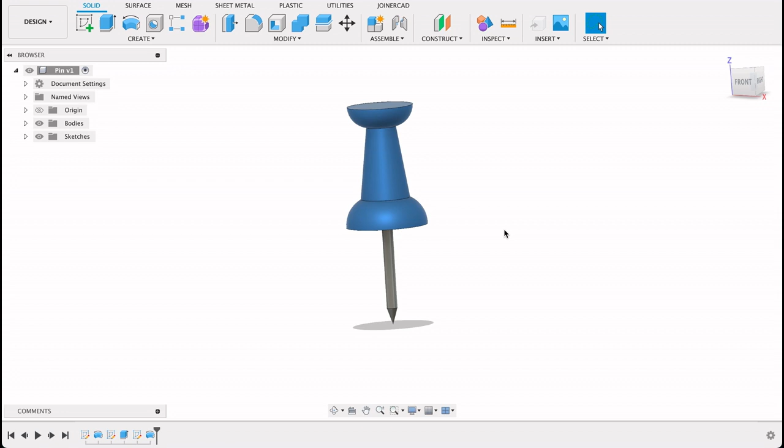So follow along and see how you go. So here, using Onshape, I've just created a new sketch. I'm going to sketch here on the front plane. I can push N and it'll make it normal to that plane. We are going to draw our pin. So we're just going to draw the head of the push pin.

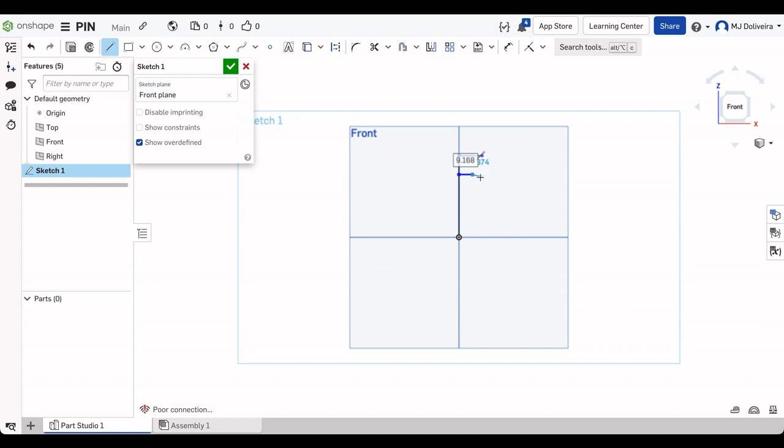I'm going to use the line tool, go up and just get a couple of these lines in. L for line tool. And I'm just going to make these random lengths and we will dimension them shortly. This bottom one I'm just going to go past there, because last time I tried to make the little curve and it was giving me some issues, so that's what I'll do there.

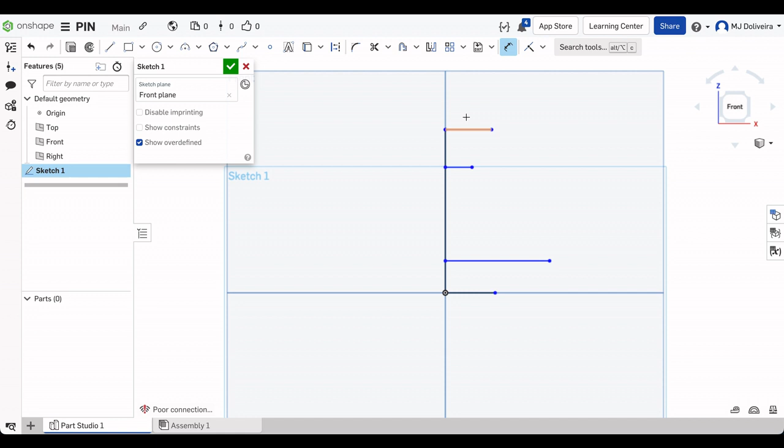And to dimension it, I have got this pin head. It's got an overall dimension on the top here of 7.3, so I can go 7.3 divided by 2 and it will work it out for me. There, it's scaled everything down for me. This next one as well, I'll dimension it. It is 3.3, so that would be 3.3 divided by 2.

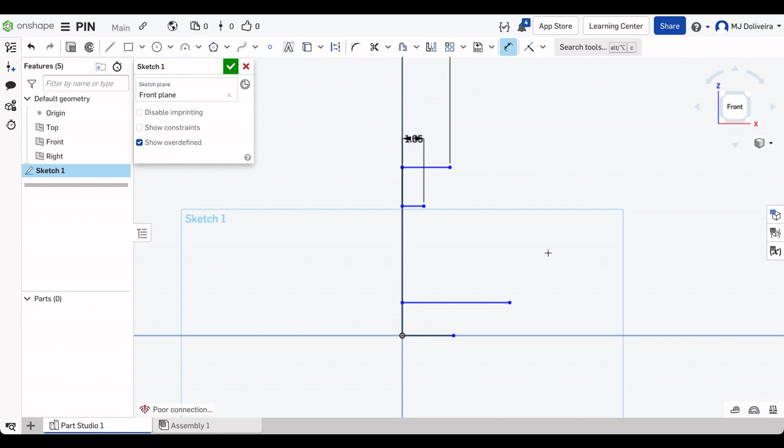So Onshape's quite a cool program. Only problem is that because it's only online, it can give you some issues when your internet speed is a bit poor.

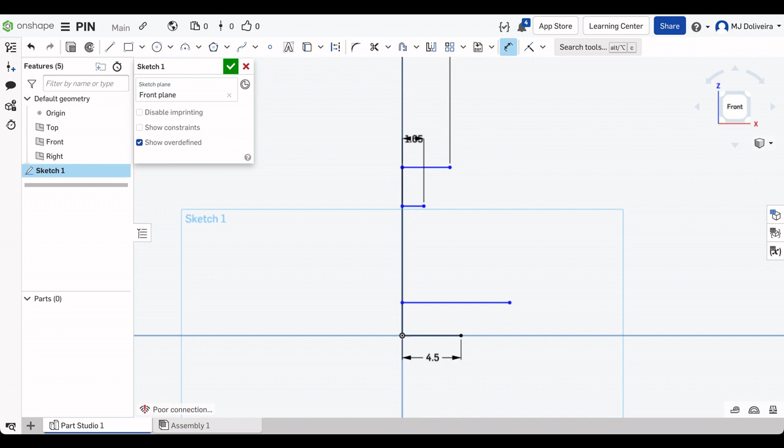So this will be 9/2. Now we can start getting the dimensions between them. So that's 3 millimeters. You'll see everything will start to turn black once it's been dimensioned. And this is 2.3.

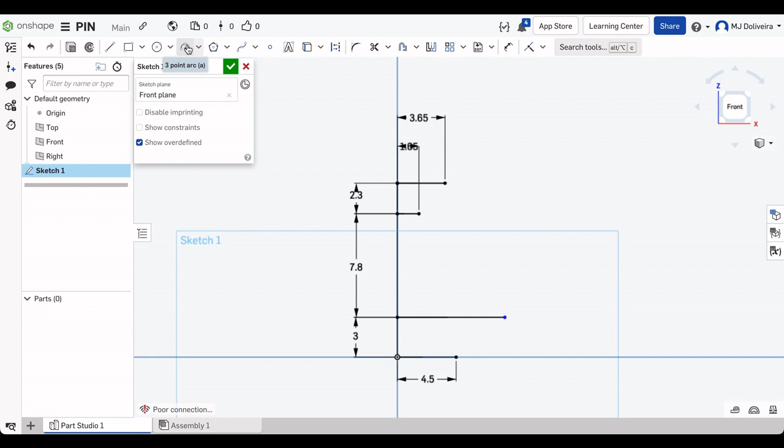We're going to start off by making this curve here. So what I'm going to do is I'm going to go to 3-point arc, select that. Select these 2 points, and you can see as we move it out, it moves it. So I'm just going to make it a little bit less than what I want, and then I'm going to dimension it. So according to the dimensions, that's 2.4 millimeters. So there we go, it is constrained according to what we want.

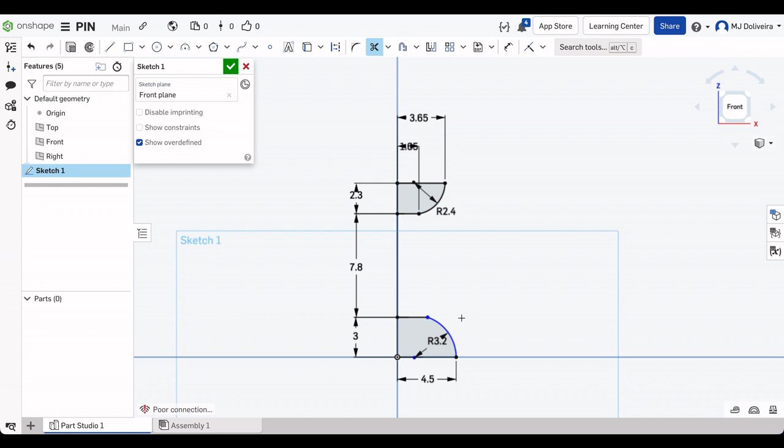Again, I'm going to use a 3-point arc, select that point, select any point on this line, and then we will go 3.2. So the reason I did it like this, when I was doing the little practice one, it was giving me some issues where it would make this big bulge or not join the line properly, so I just chose to do it like this. You can push M. M is your trim tool, so we just trim off the excess there, and then we can use our line tool and go between those points.

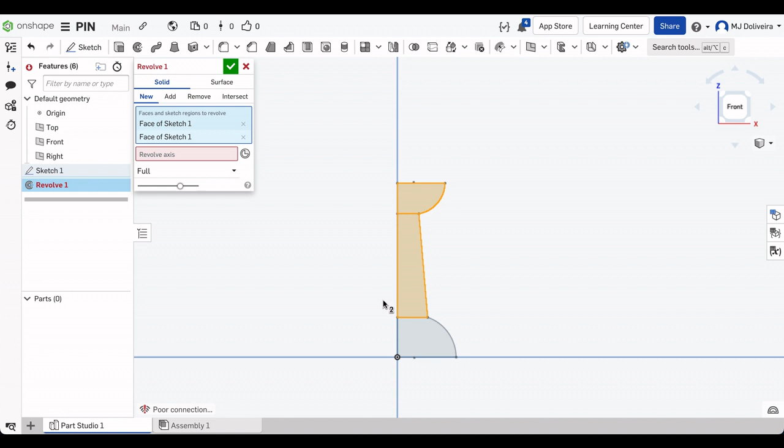Now it's the same in Fusion. We've got a revolve tool. We select the areas being revolved. Let's try that again. Okay, now selected. Now we select the revolve axis and we should have our pin head. So we can see there we've got the pin head, nice. Now we just need to draw the pin.

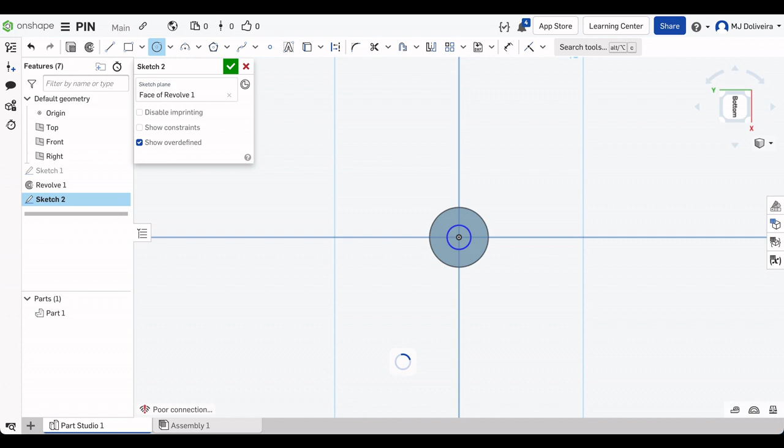So I'm going to create a sketch, select that plane and push N. We're going normal to the plane we're on. Circle, let it snap to center there. This is 1.2 millimeters. So let's just click there, 1.2. Okay, now we will extrude this.

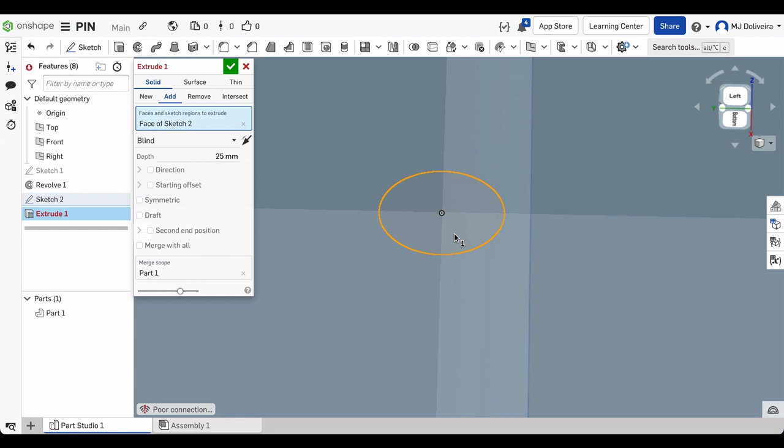You see I'm not actually selecting the right surface there. We want the inside there. And that's not 25, that's 9 millimeters. So you can check out this technical drawing on the Google Drive folder. Then you can follow along from there.

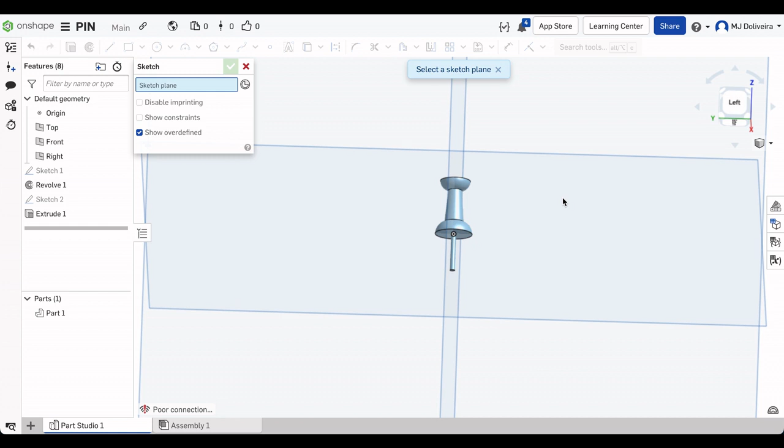Now we're just going to do the point. So I'll just do a sketch. Doesn't really matter what plane, as long as it's one of these vertical planes. And I want to use this line, so I'll push U for use.

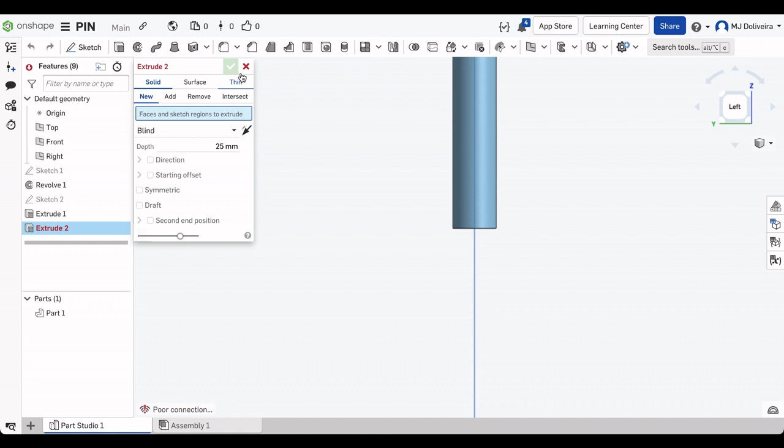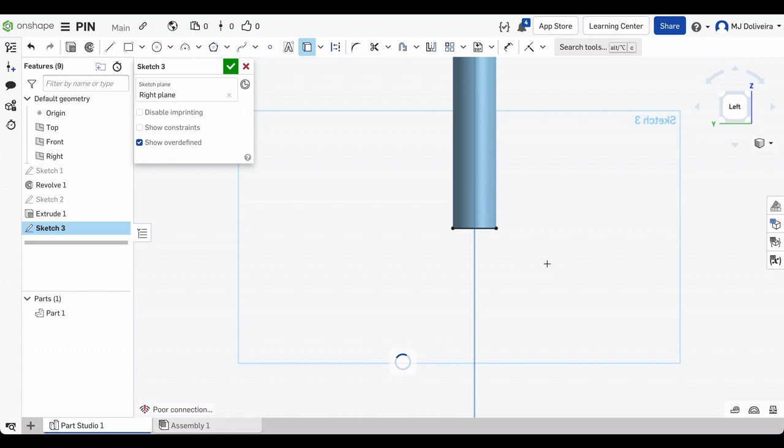Okay, so now it's giving me some issues. Let me just try that again. So sketch, selected a plane, U, sketch plane, so we've got our sketch plane, U for use. So now we can draw lines that snap onto there. See there, it snaps to the center.

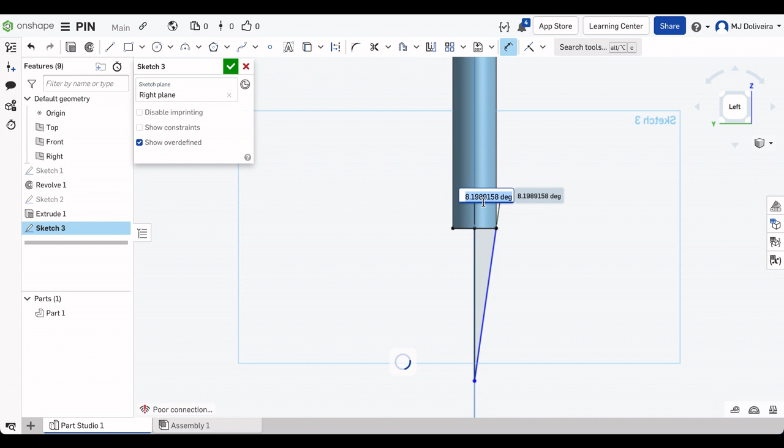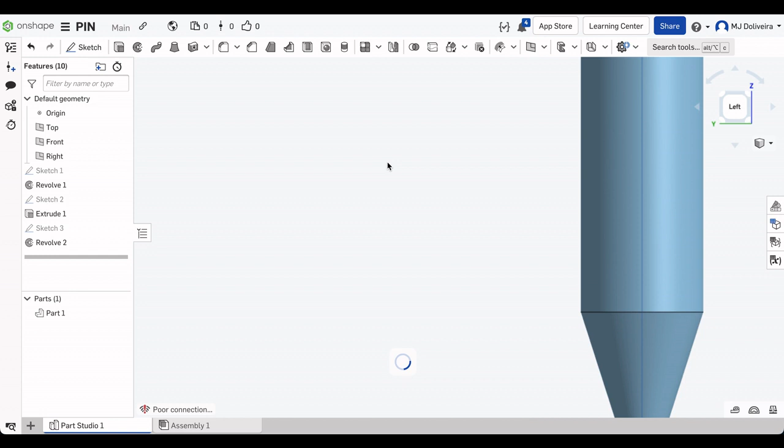And now we're going to dimension them. So this line has 36 degrees in total, so that would be 36 over 2. That would be the head of the needle. Again, we'll use the revolve tool. Select that as the revolve face, then the axis will be this axis. Let me just zoom out. And there we've got our pin.

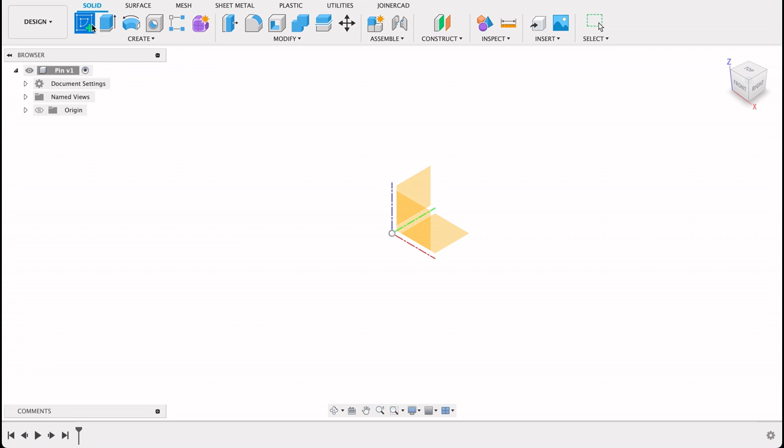Now we're going to do the same thing. We're just going to do it in Fusion 360. So now we're going to do that pin again, obviously just in Fusion 360. You'll note that it's very similar, the layout. So we will create a sketch on the front plane here. You can see it automatically rotates to the plane we want to work on.

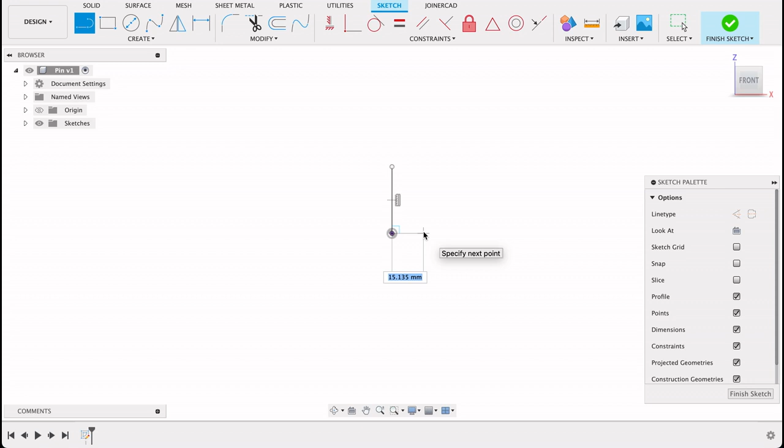Draw our lines. Again, we'll start by drawing the various lines and then dimensioning them just now. So this one is 9 over 2, we can just go 4.5, do the math. This one we made a bit longer because I had the same issue when I tried it in this one where it was doing funny things with the curve, but that's fine.

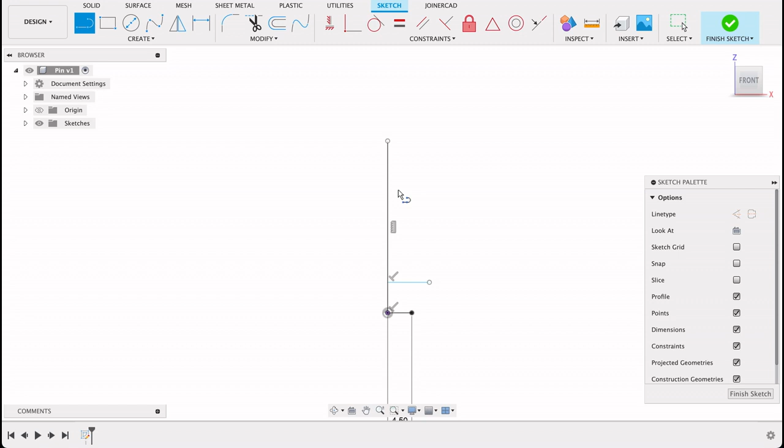This one is 3.3 over 2, and this one will be 7.3 over 2. I'm just doing it right at the end because everything will be adjusted when we do the distance between them. So let's dimension this.

The computer's running a little bit slow today, don't know why.

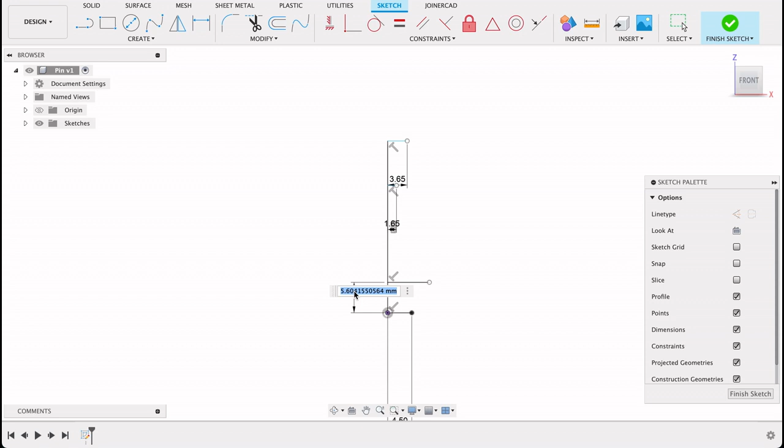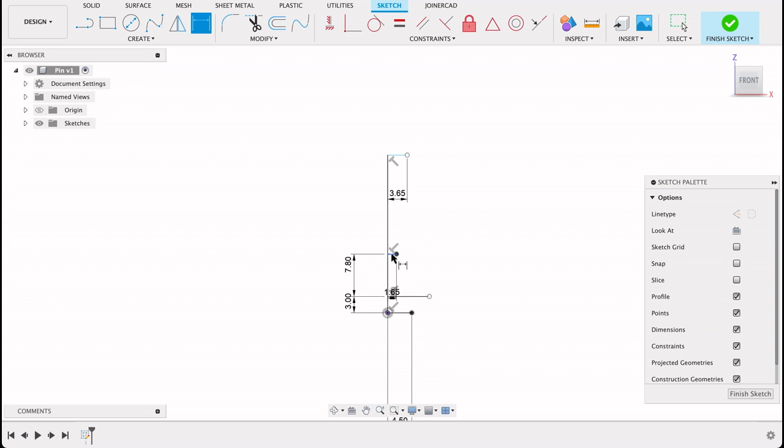There we go, 3 millimeters. This is 7.8. And this is 2.3. Okay. So that's the beginnings of what we need.

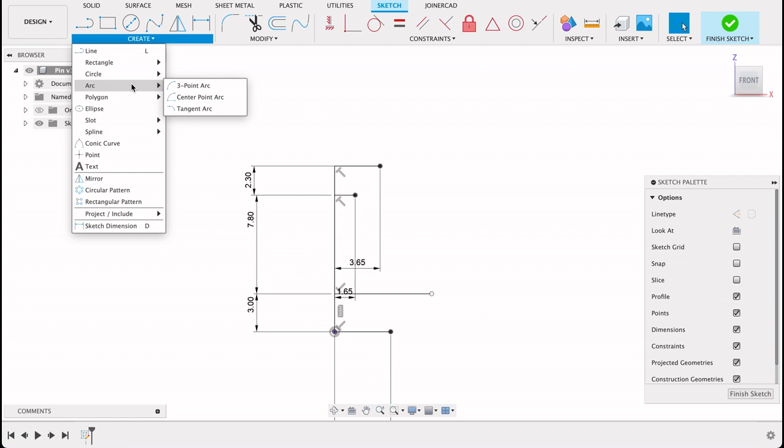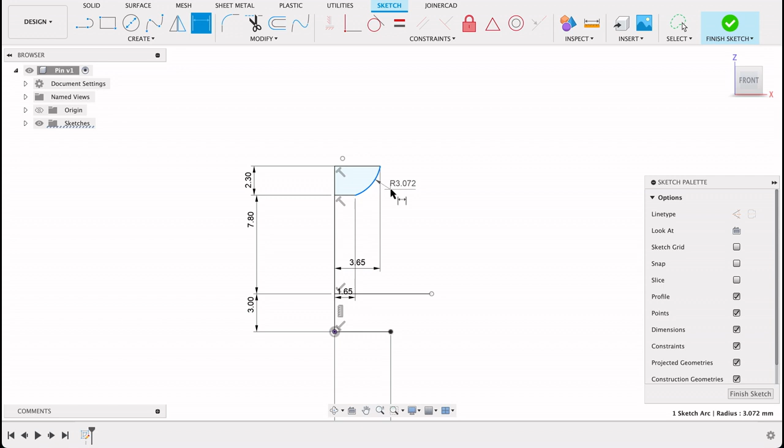I'm going to go in here and use an arc, a 3-point arc. Same as what we did in Onshape. Select the 2 points, curve it out. I don't want it to snap to tangent there because then it's going to be dimensioned already. So now I'll just dimension this, and that is 2.4 millimeters.

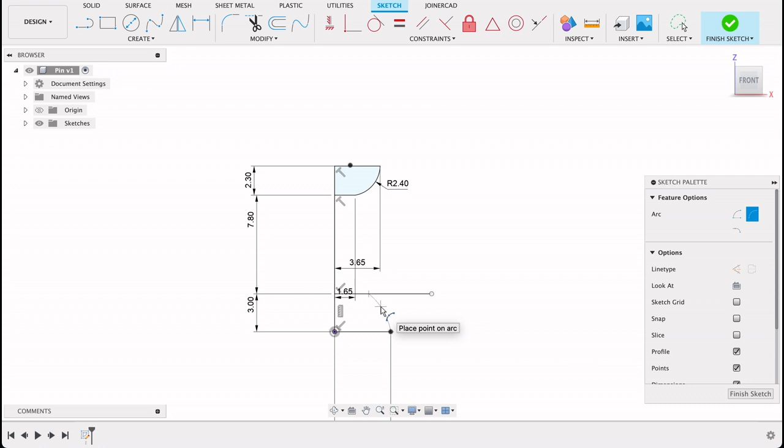Then I will create the arc again, 3-point arc between this point and this line. And dimension this one, it is 3.2. So I'll put in there 3.2, and it's made that for us.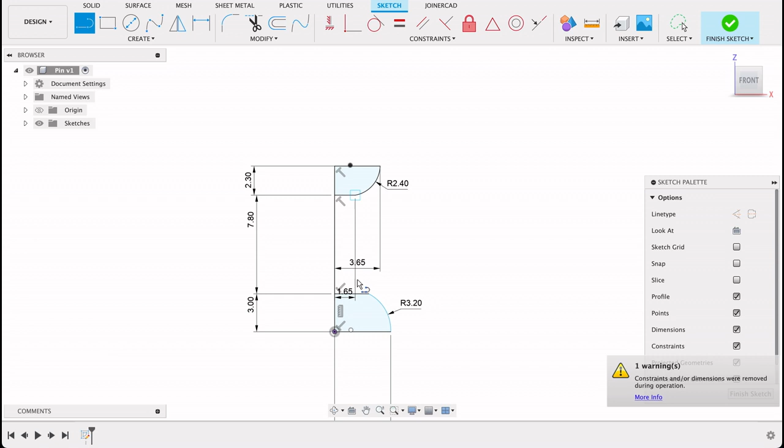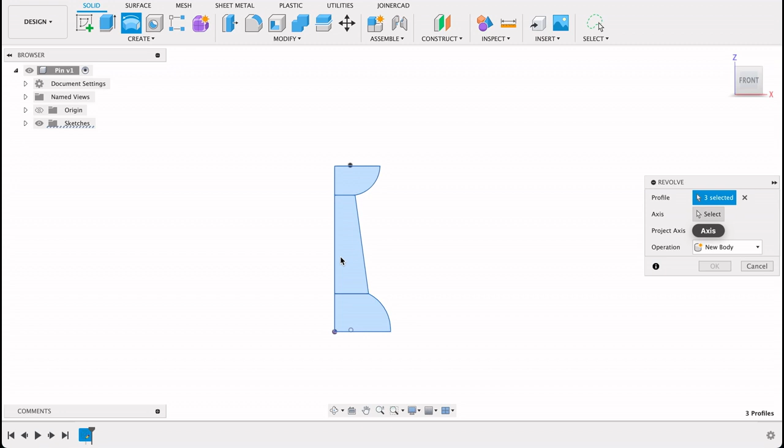So I'm going to just trim this here, trim this little excess piece, and join a line from that point to that point. You can see now we've got our closed profile that we can revolve. So we'll select the revolve tool and select the profiles, and we'll go and choose the axis as the upright there, and it's a new body.

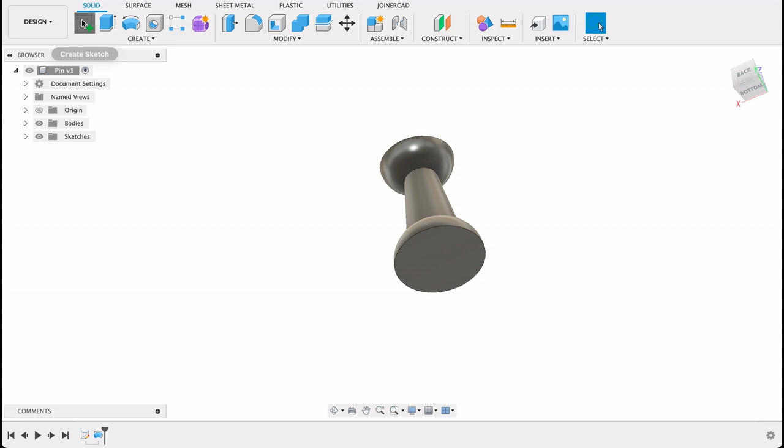Okay, so I prefer Fusion 360. It just feels a bit better, and the basic rendering is also, you get some reflection on it. It just feels a bit better. But Onshape is a really powerful tool. Only drawback is it's only online, so when you've got crappy internet like me, you have some issues from time to time.

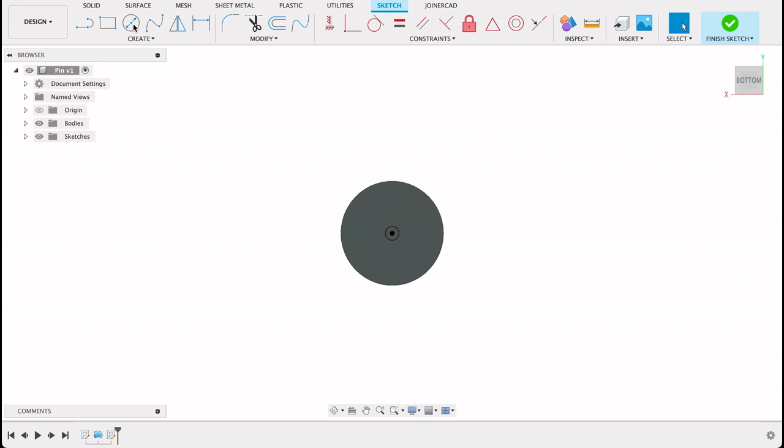So now let's do this pin. We've got our center diameter circle. Let's snap to center there. We want this at 1.2, and then I'll finish sketch. Now we'll extrude that, and this was 9 millimeters.

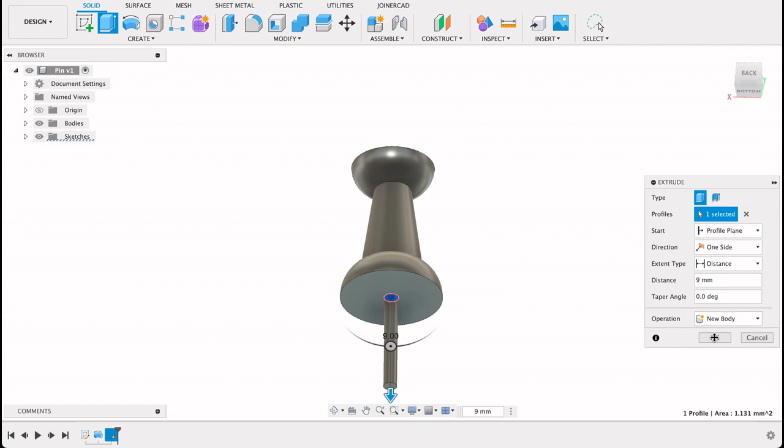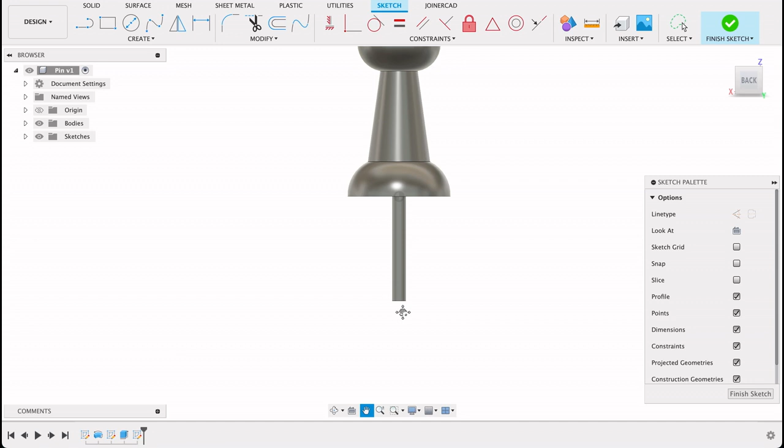Set that to 9, and I'm going to make this a separate body just so I can add some properties to it just now. So over here we'll have 2 bodies, this one and the pin, and then the head. Now we need to create the tip of this pin, so we'll choose that plane, and we want to project this, so I'm going to push P.

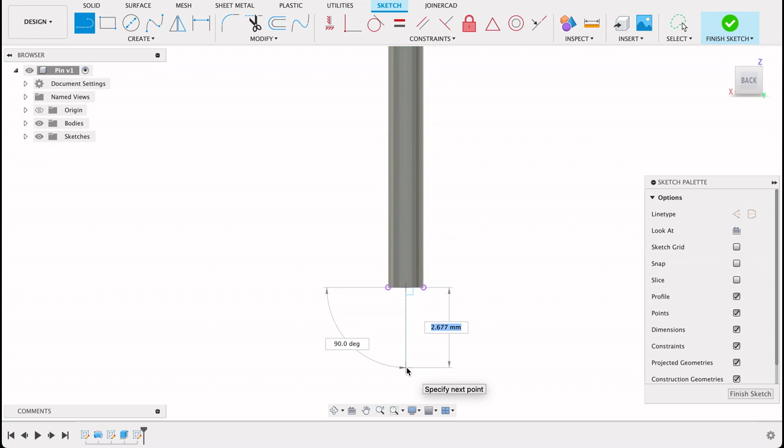We want to project that line. In Onshape it's called use, so it's just the terminology to get used to. So I'll select the center line there, go down and snap it to there. So now it's not fully constrained. What I need to do now is dimension between these two, and that was 36 degrees divided by 2.

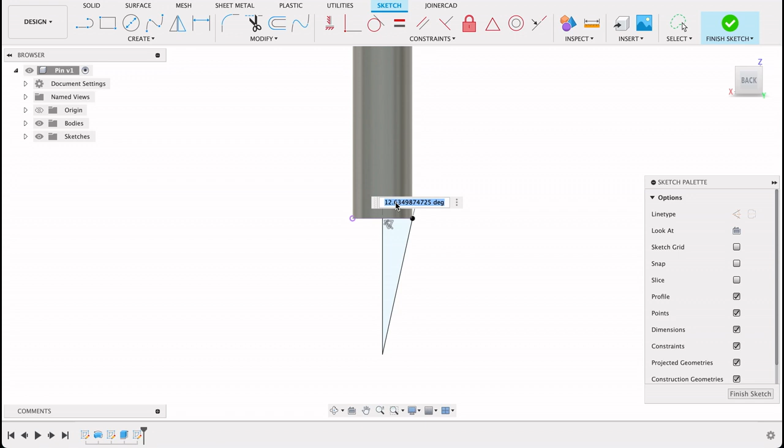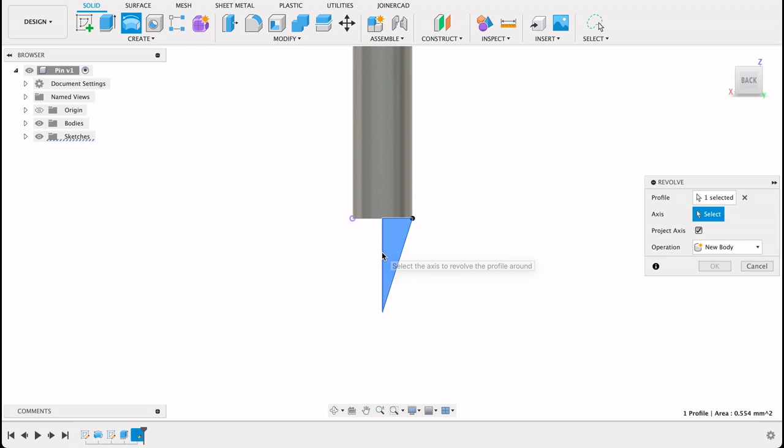So now it's set our height, it's set all the parameters, and I can see it's fully constrained. So I can finish sketch there, and then we'll go back into revolve. Select revolve on this one, select the axis, and join. So it'll join it onto that body. So there we've got our drawing pin.

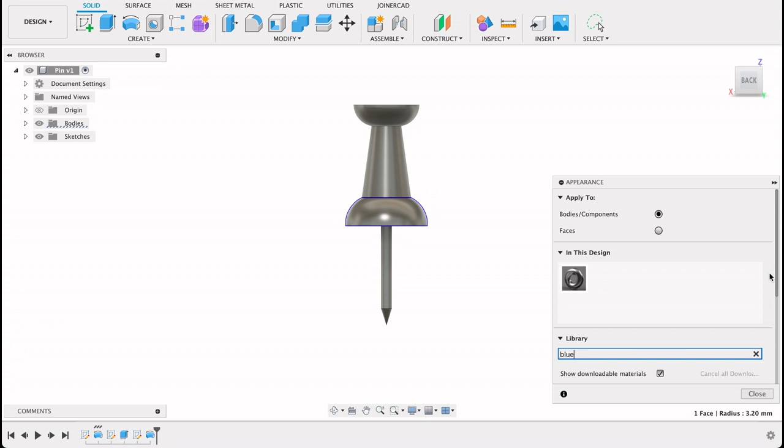I'm just going to add some color to it. We didn't do that in Onshape, but let's do it here quick. So in my technical drawing, this is a blue push pin. So let's find something blue. That looks nice. We'll drag it over, not onto the face, but onto the whole body. And then we can look for a stainless steel.

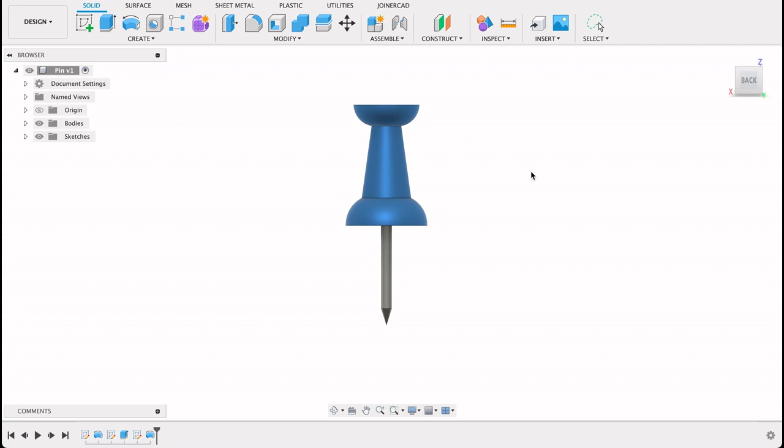Metal, stainless, and we'll just drag it across. And there we go. We've got our push pin.